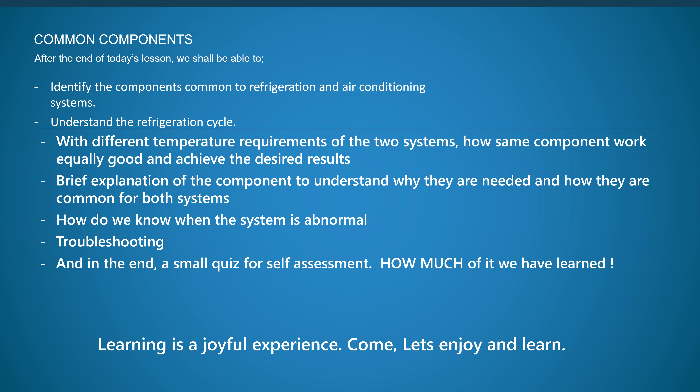Common components: refrigeration and air conditioning. Number one, first comes the compressor. It is the workhorse, because it is doing the work. The actual work is done by the compressor. Without the compressor in the system, no work will be done and we will not be able to achieve our desired results.

We'll see what I mean by compressor, what I mean by the workhorse. Condenser. Condenser, as the name implies, condenses. What does it condense? We'll see that. Receiver, the storage tank.

After the condenser, some systems will have a receiver, some systems may not have a receiver. The system will work equally well without a receiver also, but it depends on how the system is designed, and in most air conditioning or refrigeration systems you will have a receiver also.

Then comes the expansion valve. What is the function of the expansion valve? Without the expansion valve, the desired effect of the refrigerant gases which we are using cannot occur. What is the evaporator? It absorbs. What does it absorb? It absorbs the heat.

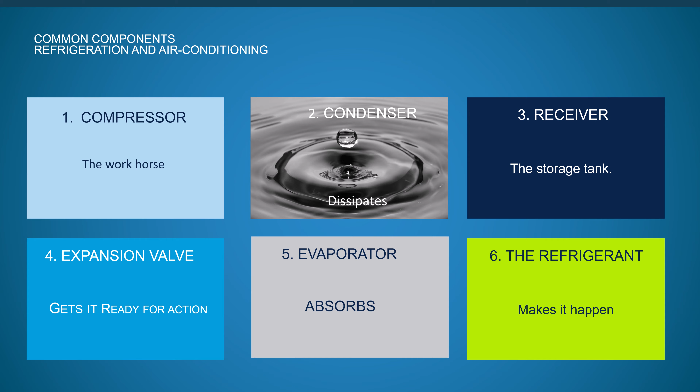Okay. Any questions? Components. We just saw a list of components which are essential for the working of the refrigeration and air conditioning system. Study of these components will make participants understand why the common components are there and the purpose of each. So each of the six components I have narrated, we will discuss one by one: what they are, their function, what work they do, how they are essential, and how they are related to each other.

All right. Other than the above mentioned components, there are various valves, compound gauges, solenoid valves, lubricating oil pumps, refrigeration gas and lube oil charging points, dryer, etc. These we will learn as we go further in the session; in different modules I'll be covering these parts also. But in today's topic, we will restrict ourselves to understanding only the six major components which I listed on the last page. Okay.

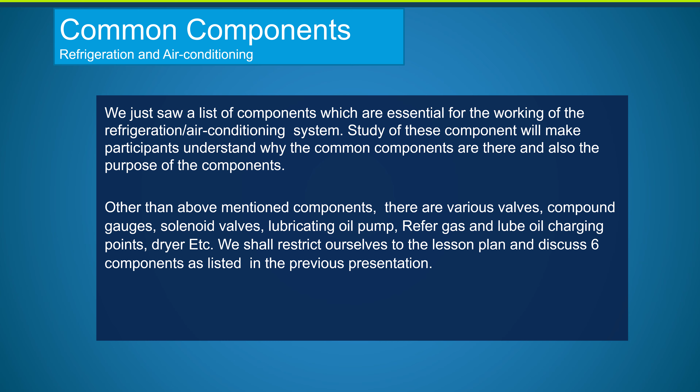Common components, refrigeration and air conditioning. Physical components of the system. We are discussing one, compressor, two, condenser, three, restriction or expansion valve, four, evaporator. All right. Here, what we have not mentioned is the receiver, for simplicity, because the receiver is actually part of the condenser. And the refrigerant gas I have not shown because the refrigerant is in the system. It's a gas; I cannot show it separately.

So the gas is in number one, number two, number three, number four. All of them contain the refrigerant gas, but in different forms. At one time it will be in gaseous form, and at other times in liquid form. Okay. So restriction is the expansion valve or thermostatic expansion valve. As I said, for simplicity, the receiver, which comes after the condenser, is not shown here. Now let us discuss the function of these components.

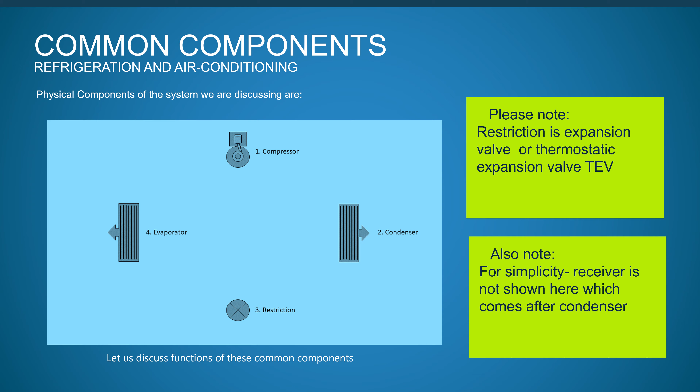Now I will start first with the refrigerant, because without refrigerant, the system will not work. Actually, without any of the components, the system will not work, but the refrigerant gas makes it happen. So we must know what the refrigerant gas is before we begin.

So although the refrigerant was not part of the components shown on the previous page, because it is in the system and cannot be seen as such, it is nevertheless the most important of all. Both systems use the refrigerant gas, or refrigerant, for achieving the specific temperature. So why do we use a refrigerant? And what is a refrigerant?

Actually speaking, what is the thermodynamics law? The thermodynamics law says heat will flow from a higher temperature zone to a lower temperature zone. Correct. And what is the function of air conditioning or refrigeration? In both cases, the heat from the compartment which is refrigerated or air conditioned is taken out and thrown outside to the ambient, to the environment.

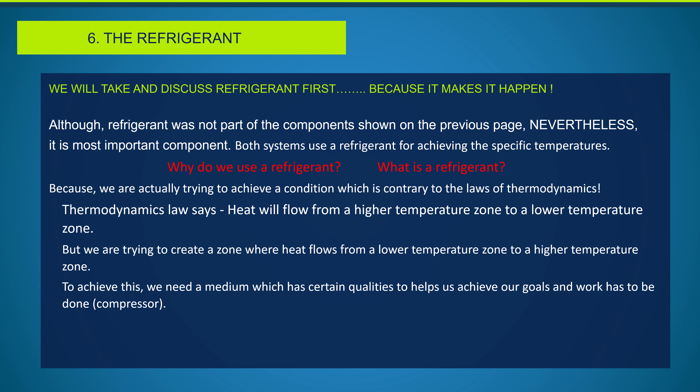And to carry the heat away, we need a medium, which is a refrigerant. Understood? And since work has to be done, that work will be done by the compressor. So I'm showing the refrigerant here first because the refrigerant as a component was not shown, because it's a gas within the system. So what should be the properties of the refrigerant?

The refrigerant should be non-corrosive, non-toxic, non-flammable, with no ozone depletion and zero global warming potential. This is for safety reasons, to protect the crew or humans for whom air conditioning is being used, or the food products kept in the refrigerator. Since global warming is an issue, and the ozone layer protects us from the ultraviolet rays of the sun, ozone depleting substances should not be used, and they are being phased out. So these should be the properties.

Another thing, it also needs to have a boiling point somewhat below the target temperature. So what is the target temperature in a refrigerator? In the refrigerator compartment, it is around +2 or +4 degrees centigrade, sometimes +6. And in the freezer compartment it is normally -20 or -22, maybe below. So to achieve the targeted temperature, the refrigerant must boil and evaporate below the desired temperature.

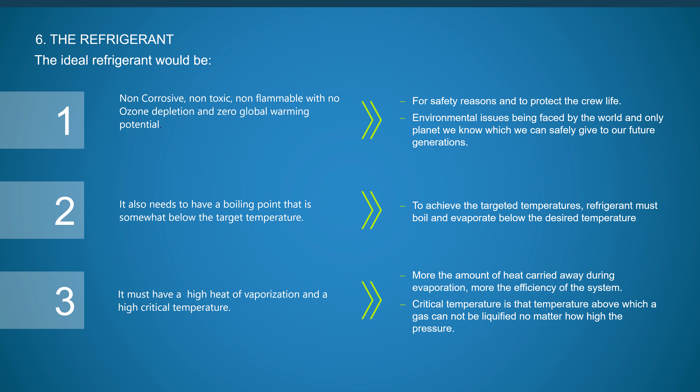So now newer refrigerants are being developed: R404A, R134A, and others, along with R32 and R290, and R1234YF is being used in cars, which is almost non-flammable. CO2 and ammonia have also been used in the past. But the CO2 critical temperature is 32 degrees centigrade, so it is not very ideal for refrigeration systems, because if the temperature is 32 and above, it cannot be liquefied, so it cannot carry out the function of air conditioning and refrigeration.

Correct? Boiling temperatures of other refrigerants, just for your information: R32 is -52, R134A is -26, CO2 is -78.5. We don't need freezer temperatures below -22 or -23, so R134A is also good for us. R32 and R134A are the most common ones in use now.

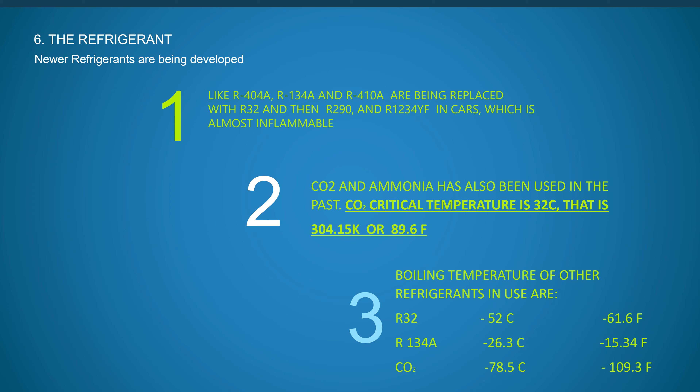Come to the compressor, the number one item which I had mentioned, the common component: the compressor, the workhorse. Since we work against the laws of thermodynamics, that means the laws of physics, heat is taken from the compartment, the refrigerator compartment or the air conditioning compartment. Heat has to be absorbed here, which is the low heat area, and discharged outside at ambient temperature, which is higher.

In summertime, the outside temperature is higher. That's why we need to lower the temperature of our house. And in a refrigerator, the outside temperature is always higher than the temperature inside the refrigerator. So heat has to be absorbed from the refrigerator or from the air conditioning area. It has to be rejected into the ambient, or what we call the outside area, the environmental area.

So heat has to flow from the low heat area to the high heat area. So some work has to be done. This work is done by the compressor. Actually, it is not a pump. But for the purpose of understanding, it can be said to pump heat from a low temperature to a high temperature area. So it's taking suction from the low heat area. Heat is being sucked out and pumped out to the outside area.

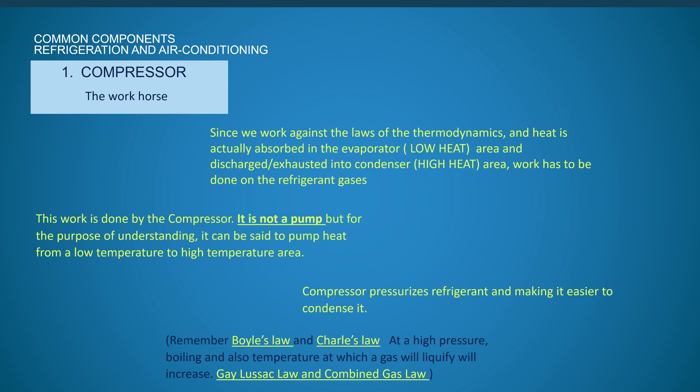Condenser. What is a condenser? As the name implies, it condenses. But what is the effect of condensing? The gas refrigerant enters the condenser at a higher pressure because the compressor has increased the pressure. So it condenses refrigerant which is at a higher pressure and higher temperature also. Pressure increases, temperature also increases. So it takes heat away from the refrigerant and rejects it at the ambient temperature.

Because of the high temperature of the refrigerant, heat is rejected in the condenser. Here, because of the higher pressure, it becomes liquid. And when it becomes liquid, this heat is taken away from the refrigerant, which it had actually brought from the room being cooled, and also the heat given by the compressor, because work done got converted into heat. So this heat is given away in the condenser.

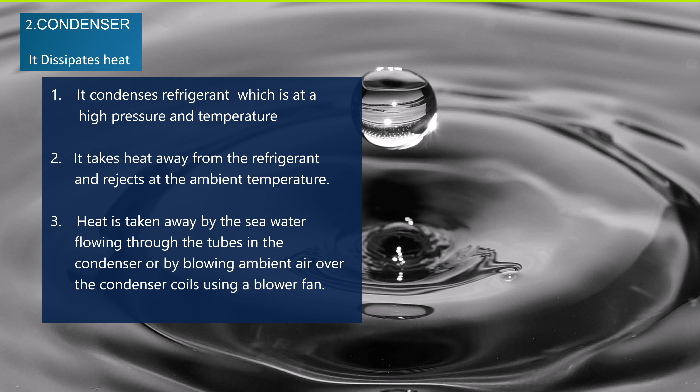So heat is taken away generally by seawater on ships, flowing through the tubes, or sometimes by blowing ambient air in shore establishments or in your refrigerator or air conditioning at home. So heat is rejected. That means it dissipates the heat. Where does it dissipate? It dissipates the heat to the atmosphere.

Heat removed while liquefying vapors is then rejected in the condenser. So refrigerant vapors are being condensed, becoming liquid, and also rejecting the heat which it had brought from the room which was being cooled or a refrigerated area, and it is dissipated in the ocean or the atmosphere. On ship, the condenser is cooled by seawater, and heat is taken away by the seawater and rejected into the ocean. Ashore, in the shore establishment, a fan blows ambient air over the hot condensing coil. This cools and condenses the refrigerant, but heats up the air blown over the condenser.

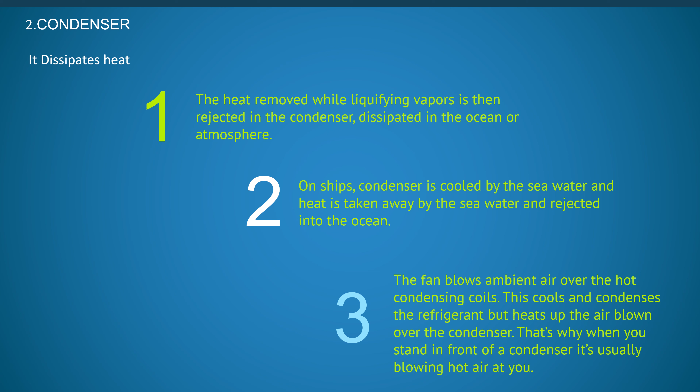Also, fresh water can be used in industrial applications, when, let's say, large buildings have to be cooled. That's why we have a cooling tower, where this water is falling down from the top and becomes cooled down, and again it enters into the condenser to liquefy the refrigerant gases.

This comes after the condenser. It's a kind of storage tank. It acts as a storage tank and surge tank for liquid. Suddenly, when the demand increases, the liquid will flow out from there. If the demand is less, liquid will remain stored there. That's the only purpose of it, nothing else. So without a receiver, the system can also work. The receiver also acts as a kind of vapor seal, keeping refrigerant vapors above the liquid refrigerant in the receiver. What does it mean?

The liquid from the condenser comes to the receiver. Whenever there is liquid present, vapors will also be present until the whole compartment is fully filled up with the liquid. So the receiver will have some level, and there will be some area where there is no liquid. That area will be filled with refrigerant vapors. So it acts as a kind of vapor seal. Now the vapor cannot go to your expansion valve. Only liquid will go. So the receiver is sealing the vapor.

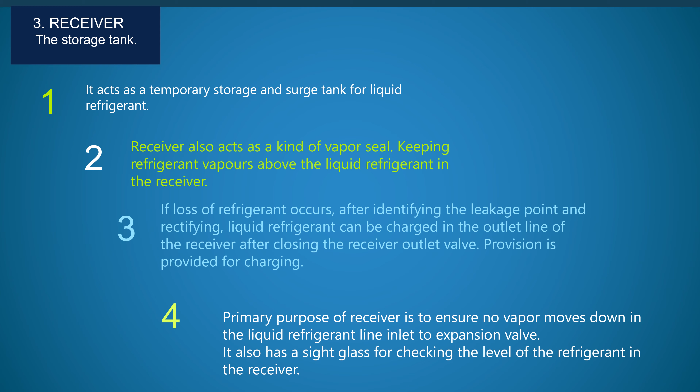Now, the expansion valve, number 4. All components are essential, but this is the component which makes the refrigerant work and take the heat away from the system. How? Because the refrigerant is still at a high pressure before the expansion valve. From the compressor, it was in gaseous form at a high pressure. When it enters the condenser, it's in vapor form, high pressure. After the condenser, it is no more gaseous; it is liquid form but high pressure.

Now this pressure has to be reduced before it enters the evaporator, and the pressure is reduced by the expansion valve or restriction. If high pressure refrigerant enters the evaporator, liquid refrigerant will evaporate at high temperature. What is the temperature at which a liquid will evaporate? It depends on the pressure at which it is kept. At high pressure, liquid will boil or evaporate at high temperature. Remember Boyle's law, Charles's law. If refrigerant liquid is at a lower pressure, it will evaporate at a lower temperature. But we need a lower temperature, so we need to lower the pressure.

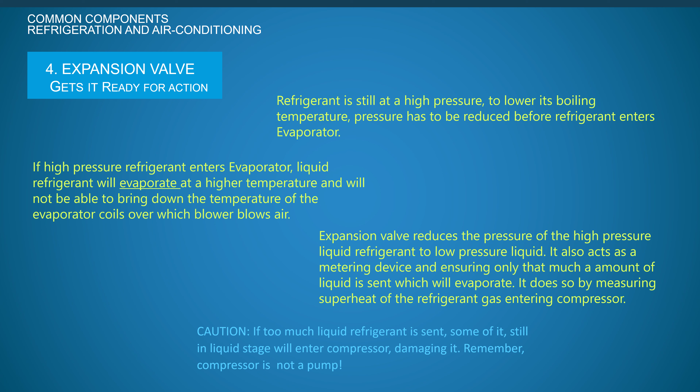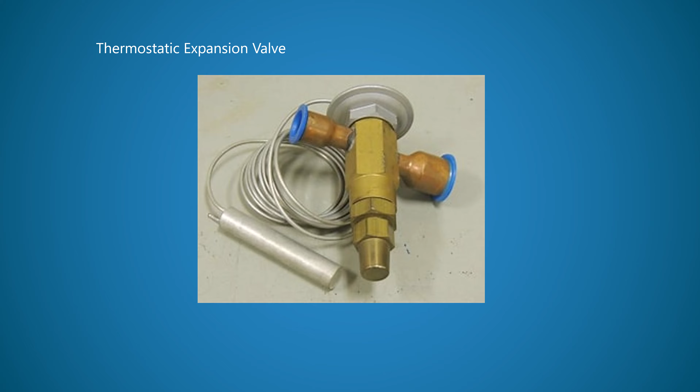As I said, caution: if too much liquid refrigerant is sent, some of it still in a liquid stage will enter the compressor, damaging it. So again, I say a compressor is not a pump; it's a compressor. It will handle only the vapors, gaseous. Thermostatic expansion valve. I will explain it in a different chapter later on.

The heat is absorbed by the liquid refrigerant as it enters the evaporator. Now, liquid is entering at a low temperature, at a low pressure into the evaporator. The evaporator is placed in, let's say, the compartment which needs to be cooled, or our house. Now the liquid will evaporate at low pressure. And when it is evaporating, it needs heat to evaporate. It will take heat from the refrigeration compartment or your house, which we need to be air conditioned or temperature lowered.

So a blower generally blows the air over the evaporator coils, thus making cool air spread the coolness in the proposed area, in your house. That's why you have cool air. This cool air is coming after flowing over the evaporator. The evaporator coils are cooled, so this air gets cooled, and this cold air is entering into your house. So that's how your house gets cooler.

Similarly, in the fridge compartment, a similar phenomenon is taking place. There is also an evaporator. The small blower is pumping the cool air, because the temperature of the air drops as it passes over the evaporator coil, and therefore it is able to maintain -8 degrees Fahrenheit or minus 22 degrees centigrade in the freezer, or 22, 23, 24 at home.

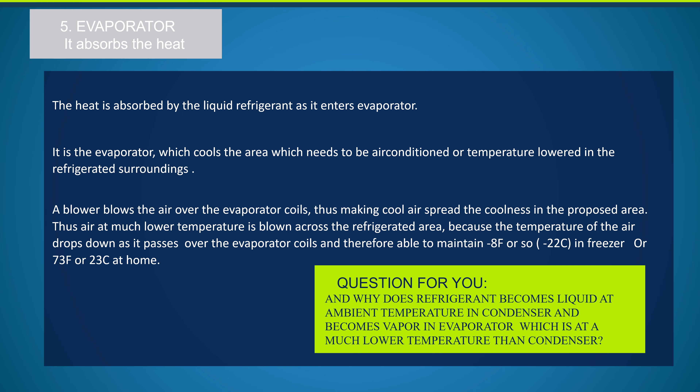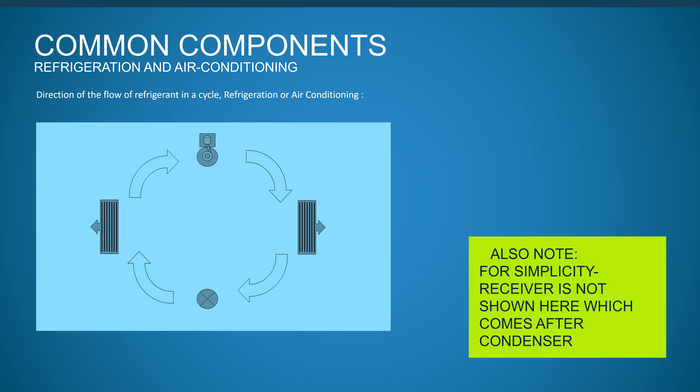Refrigeration and air conditioning. Again, this is the cycle. The transfer of heat energy. Remember, heat is absorbed by the evaporator and rejected by the condenser. So the red line is the vapor line, gaseous form. Whatever is shown in red is gas.

Compressor pumping gas entering the condenser becomes liquid, high pressure. Coming to the expansion valve, liquid form. Comes out liquid, low pressure. Entering the evaporator, liquid form, low pressure. This is the evaporator. This is your room, your house, or your refrigerator compartment. The blower takes the heat away, makes the room cooler.

Refrigerant becomes gas, enters the compressor. The compressor compresses it, raises the pressure. So the heat is now in the refrigerant vapors. The vapors enter the condenser, get cooled, become liquid, and heat is ejected to the atmosphere, ambient temperature. All right.

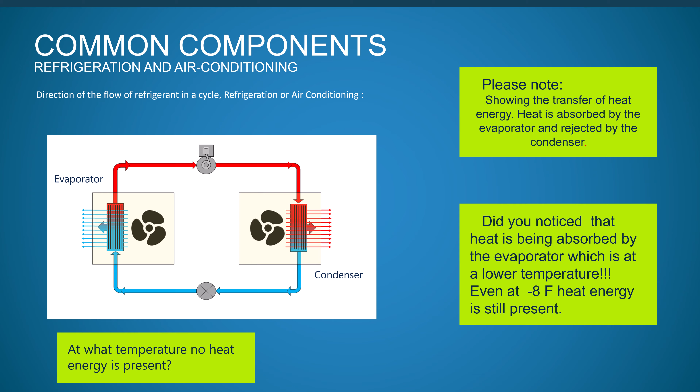Just a question: at what temperature is no heat energy present? Can you tell me? At what temperature is no heat present? You know absolute zero? Yes, correct. Any questions so far? Post any question if you have.

Now, if you divide the system vertically, as I have shown here, it becomes left and right. The right side is the high pressure side, correct? The left side is the low pressure side. That means after the expansion valve, the evaporator, and up to the suction of the compressor, the refrigerant is at low pressure, but partially liquid, partially vapor or gaseous form.

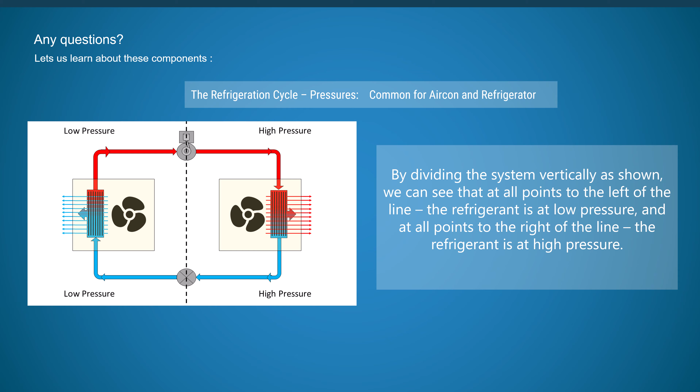On the right side, we have the high pressure side: gaseous form before the condenser, liquid after the condenser, but always at high pressure. All right, correct? No.

In this case, dividing the system horizontally. What are we dividing? Upper side is gaseous form, lower side is liquid form. By dividing the system horizontally, as shown, we can see that at all points above the line, the refrigerant is in a gaseous form, and at all points below the line, the refrigerant is liquid.

In the middle of both the condenser and evaporator, where the change of state of the refrigerant happens, the refrigerant is present in both liquid and gaseous states. You can call it vapor. Correct? Is it clear?

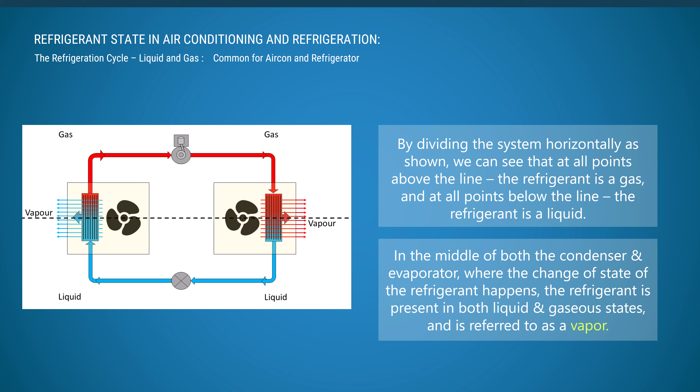Now, did you notice in this complete air conditioning and refrigeration cycle, we have introduced three new terms: superheat, saturated, and subcooled. What is the meaning of these terms? So here, gas or vapor enters the compressor as low pressure superheated gas. What comes out is high pressure superheated gas.

It enters the condenser, it becomes high pressure but saturated vapor, because it is partially liquid, partially gas. But what comes out is high pressure subcooled liquid, also called undercooled. That comes out from the expansion valve, but now it is in the low pressure subcooled liquid form.

Now it enters the evaporator. It enters as a low pressure subcooled liquid, but then it turns into low pressure saturated vapor. Some liquid, some vapor. But eventually what comes out and enters the compressor is low pressure superheated gas.

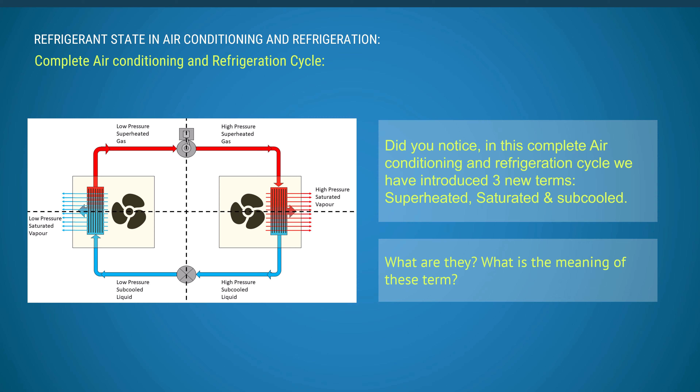I am not going to explain fully what superheated, saturated, and subcooled are, because I'll be covering this further as we go in the air conditioning modules. There will be some more modules coming. There I will be discussing this. Okay. So briefly I will explain.

Superheat is an amount of heat added to refrigerant vapor beyond its boiling point. This ensures the refrigerant is in a gas state with no liquid present. Saturated is when the refrigerant is a vapor with both liquid and gas present. Where in the system these three states are present, you can go back and see again.

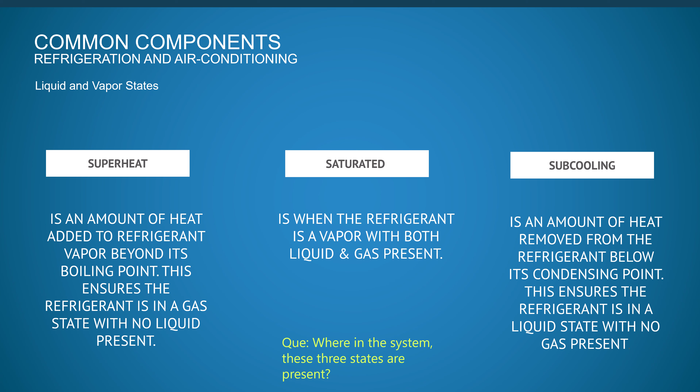Subcooling or undercooling is an amount of heat removed from the refrigerant below its condensing point to cool it further below. It condenses, but we continue to cool it. That is undercooling. This ensures that the refrigerant is in a liquid state with no gas present, no vapor present. That is the purpose.

Superheat ensures no liquid makes its way back to the compressor. Although we say the compressor acts like a pump, as I said, truly speaking, it isn't a pump. A pump usually moves liquid by way of an impeller, whereas compressors, as the name suggests, compress the volume of the gas, which raises both its temperature and pressure.

Liquids can't be compressed, and any liquid making its way back to the compressor can cause serious damage. That's why no liquid refrigerant should enter the air conditioning or refrigeration compressor. It will damage the compressor.

Subcooling is important as it ensures only pure liquid makes its way to the expansion valve, a kind of metering device, because it allows the quantity of liquid which is required, no more, no less. This maximizes the capacity, efficiency, and reliability of the system.

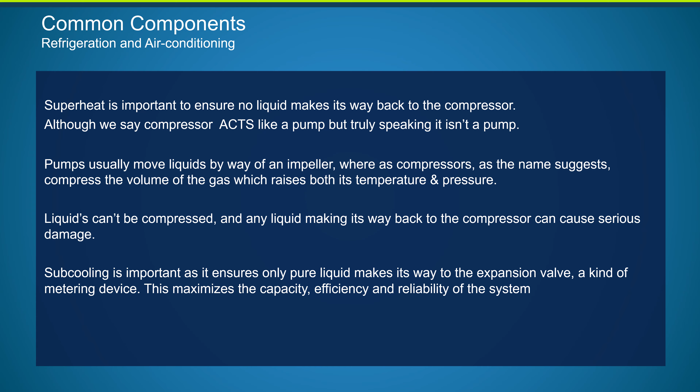So the refrigerant cycle, let's have a look at it. The compressor compresses the gas, changing it to a high pressure superheated gas. All right. Then it enters the condenser. Inside the condenser, the gas begins to cool and change state to a liquid. Additional cooling inside the condenser causes the refrigerant vapor to condense further, making it subcooled liquid or undercooled liquid.

From the condenser, liquid refrigerant passes into the receiver, which acts as a storage tank and ensures no vapor passes to the expansion valve. Only liquid should pass through the expansion valve. As the high pressure liquid refrigerant passes through the metering device or expansion valve, it enters a low pressure environment, causing some liquid refrigerant to flash off into vapor.

Remember the nozzle on an aerosol spray. Inside is liquid; the moment you press it, what comes out is vapor, and some liquid droplets also. Exactly the same thing is happening here. A small restriction, the expansion valve, with liquid passing at high pressure. What comes out on the other side should be liquid, but some vapor is also present.

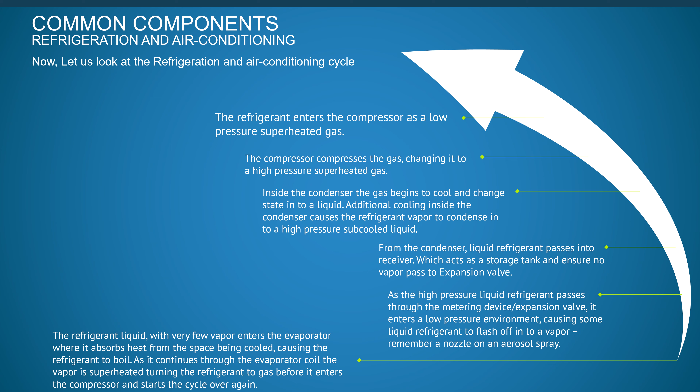So refrigerant liquid with very little vapor enters the evaporator, where it absorbs heat from the space being cooled, causing the refrigerant to boil. As it continues through the evaporator coil, the vapor is superheated, turning the refrigerant to gas before it enters the compressor and starts the cycle all over again. Okay.

This is the same thing being represented pictorially. The compressor compresses the gas, changing it to high pressure superheated gas. Inside the condenser, the gas begins to cool and change state to liquid. Additional cooling inside the condenser causes the refrigerant vapors to condense to high pressure undercooled liquid, subcooled liquid.

As the high pressure liquid refrigerant passes through the metering device, that is the expansion valve, it enters a low pressure environment, causing some liquid refrigerant to flash off into vapor. The refrigerant liquid enters the evaporator, where it absorbs heat, causing the refrigerant to boil. As it continues through the evaporator coil, the vapor is superheated, turning the refrigerant to gas before it enters the compressor and starts the cycle all over again. The same is represented pictorially here. All right.

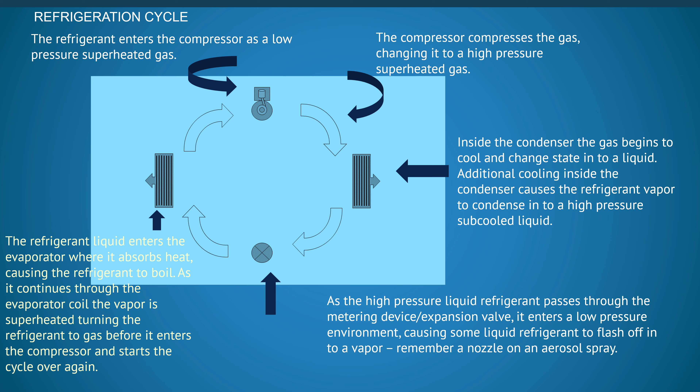This is just for your information. You're welcome if you want to contribute anything.

Troubleshooting. Sometimes things may go wrong. What are the problems we may face? Let us see. Low pressure cutout is stopping the compressor. There, of course, are safety cutouts and all. One of them is the low pressure cutout.

So what if the compressor is cutting out again and again? Check that all the suction line valves are in open condition. Refrigerant is properly charged; maybe the liquid amount is not less. Check the receiver. Low pressure cutout is not defective.

Defective oil pressure cutout causing compressors to cut out. Check for proper functioning of the oil pressure cutout. Replace it if it's defective. Ensure sufficient oil level is seen in the sight glass.

Motor overload cutouts are activating, stopping the compressor. Ensure that the electric motor trips are working properly. Check the motor is not drawing over current for whatever reason and is being tripped by the safety circuit.

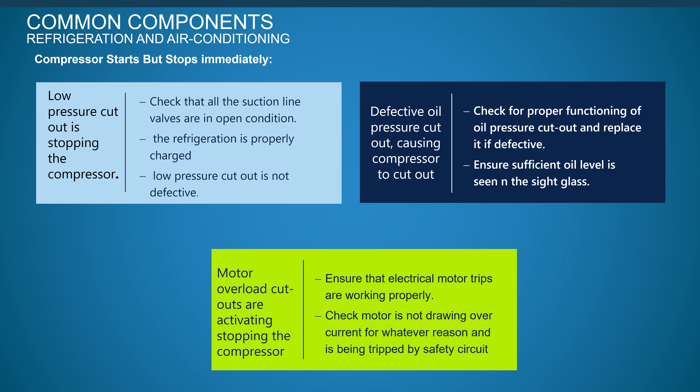Wrong setting of cutouts: the high pressure cutout is set too low or the low pressure cutout is set too high. Check and change the settings. Clogged filters: the compressor is provided with a filter in the suction line. If that is clogged, it will lead to frequent LP cutout. Check and clean the suction filter. Remember, all filters need to be cleaned as a routine, maybe weekly or fortnightly, whatever your ship decides.

Defective condenser blower fan motor runs and stops intermittently. Check the motor capacitor wiring if the condenser blower fan is not running. It's talking about a single phase motor. On ships, we don't use single phase, we use only three phase motors.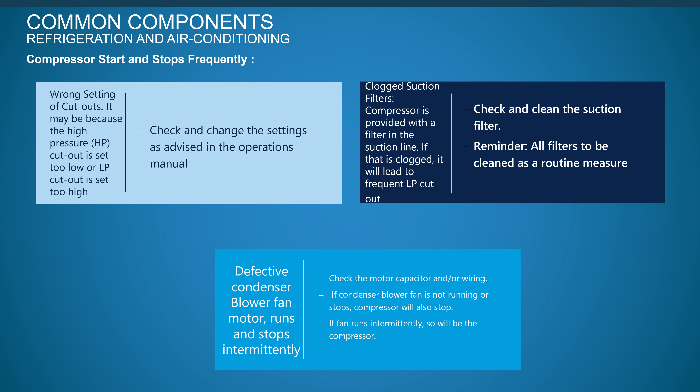The function of a compressor in a refrigeration system is to act as a pump to circulate the refrigerant in the cooling circuit. It can happen that to maintain the cooling temperature in the room, the compressor is running continuously. If this happens, the following can be the cause: insufficient refrigerant, not able to provide cooling through the evaporator, though the reservoir shows adequate level. Check that the thermostatic expansion valve is working properly. Maybe it is not sending a sufficient amount of refrigerant.

Refrigerant charge is too low. Check for leakage. Charge the refrigerant. Remember, refrigerant can be charged as a liquid or a vapor, but only at the suitable point. There are certain points given for charging. At some charging points you can charge refrigerant in vapor or gas form. At some places you can charge it in liquid form. So don't make a mistake.

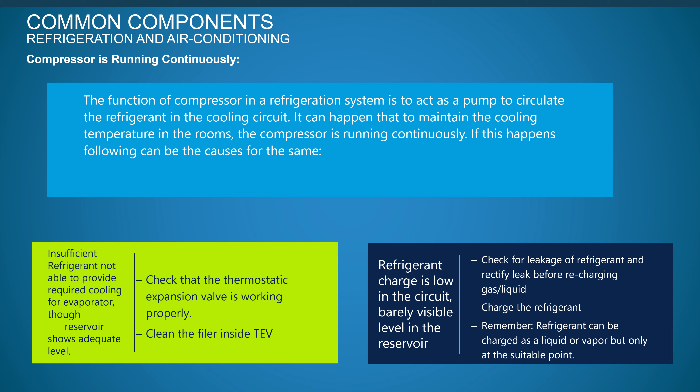It may happen that all provision rooms or cargo holds are maintained at correct temperature, but in doing so, the discharge temperature of the compressor is going above the limit. High compressor discharge pressure, excessively high suction temperature due to less refrigerant is possible. Recharge the circuit to maintain refrigerant quantity. Ensure the TEV, thermostatic expansion valve, is set properly and supplying enough

amount to the evaporator. Insufficient cooling because of high seawater temperature, a choked cooler or broken fins of the blower. Supply more water. Clean the cooler. Check the proper functioning of the oil pressure cutout and replace it if defective. Check for broken fins of the blower fan.

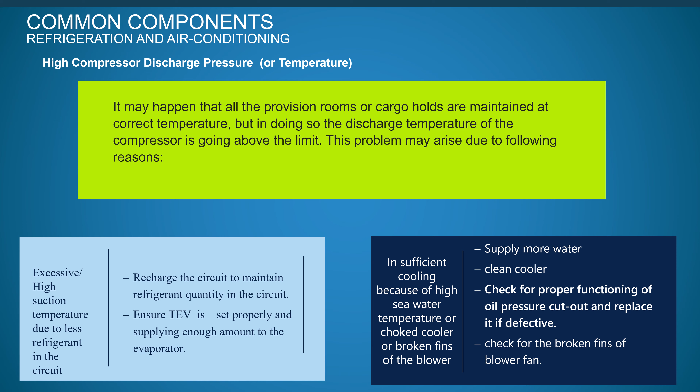Common maintenance procedures. Another common problem with the system is icing of the evaporator coil, which may happen due to too low temperature setting. Increase the coil temperature by adjusting the TEV, thermostatic expansion valve, and thermostat correctly. Inadequate coil capacity: possible design fault. Install larger capacity evaporator coils. Defrost cycle defective: set it correctly.

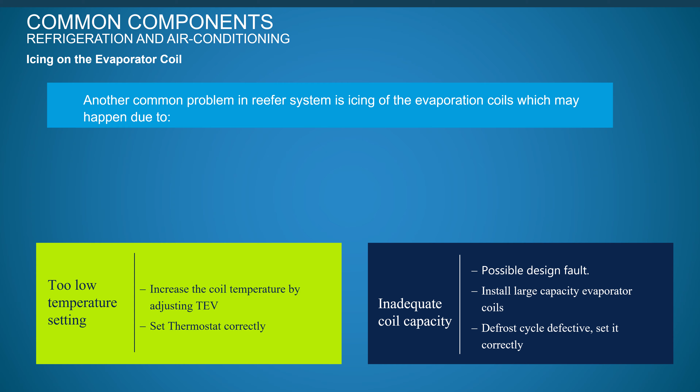Let us see what we discussed today, a kind of recap. We discussed common components of refrigeration and air conditioning systems, the requirement of those components in the system, their functioning, what each component does in the system, why it is required, what function it carries out, commonalities and similarities in both systems, abnormal conditions and troubleshooting. Okay, did we achieve our goal? Let us see.

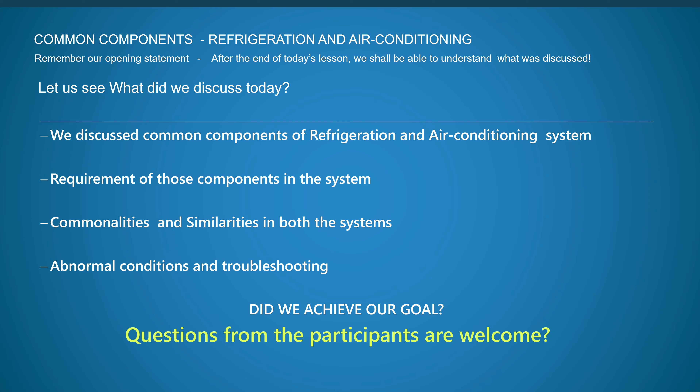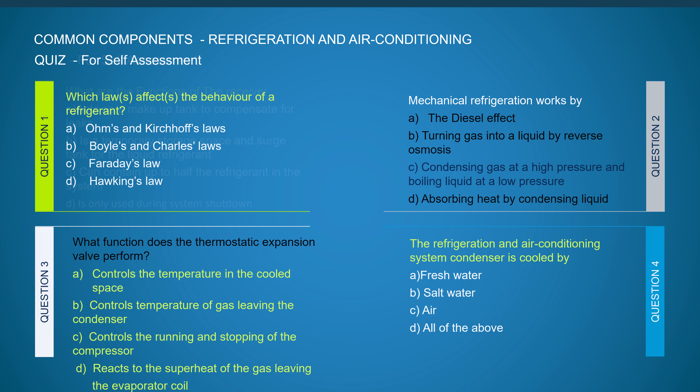If you have any question, you can write it down, post it on the channel, and now let's see how much we have learned. Questions for you. Go through them and answer them. If you can answer, well and good. If you cannot answer or have a question, ask me, post it on the channel, and I will answer. All right, for you.